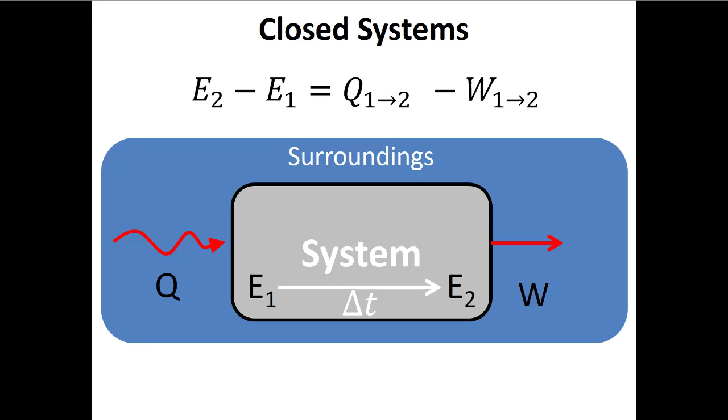And this is great as long as mass is not coming into or out of the system. The problem is, what we've learned so far is that mass itself carries some energy with it. This internal energy we've been talking about goes along with the mass. So if we have mass coming in and out of the system, we're going to have to use a more complicated version of the first law that tries to account for the energy that's coming into the system or leaving the system with the mass.

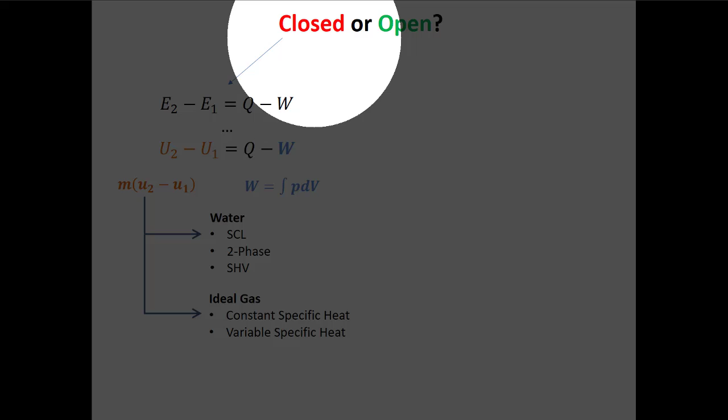So we know for closed systems, if you're thinking about studying for your exam, this is what we know: when we ask, is the system open or closed? If it's closed, we know we have this version of the first law. Then, if we make some assumptions about the relative importance of different energy terms on the left-hand side, we can get that it's the change in the internal energy that's equal to Q minus W.

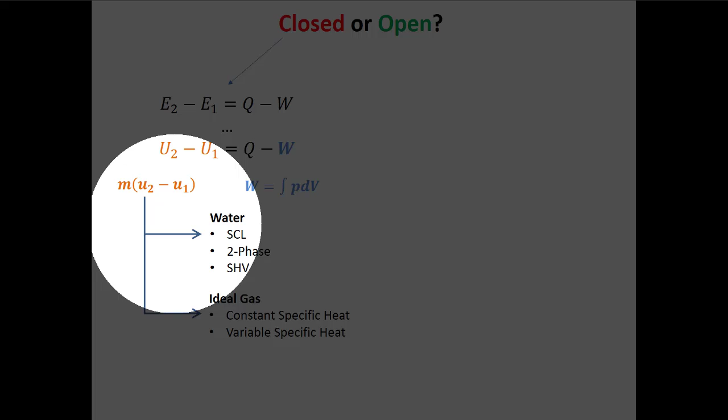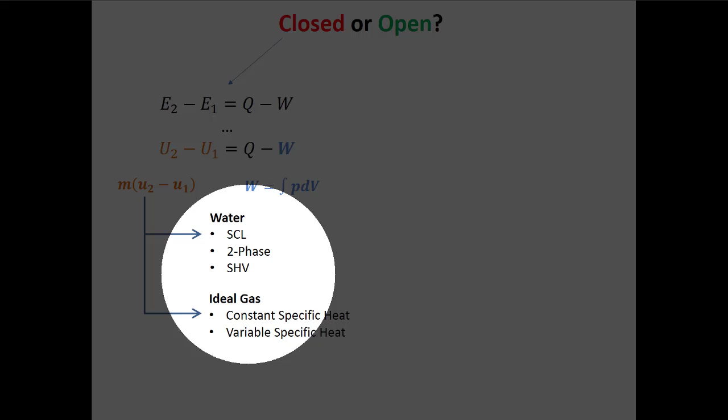We know how to find work, that's the integral of PdV. And then we can find delta U by taking the mass times the change in the specific internal energy. To do that, we need to ask ourselves, what's the fluid? And if it's water, I need to figure out which phase I have, whether that's a liquid, a vapor, or some mixture of the two, or whether the fluid inside my system is an ideal gas.

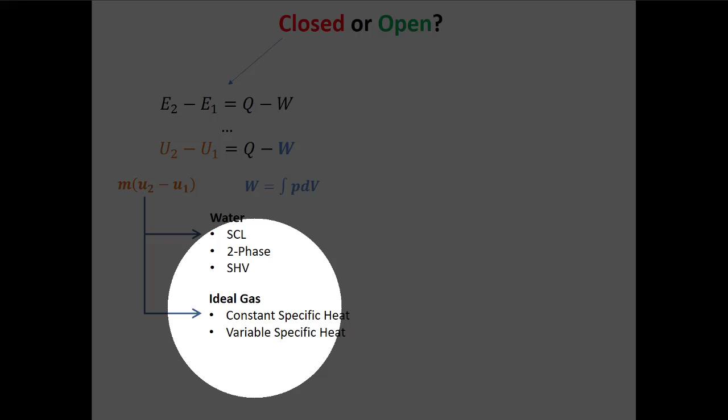And if it's an ideal gas, I can use the ideal gas law, but I also have to worry about what's going on with the specific heats. Is it constant specific heat, where I can say delta U is CV times delta T? Or is it a variable specific heat, where if I'm dealing with air, I have to look at table A22. So that's what happens if the answer to is it open or closed is closed. So we sort of know how to do that now.

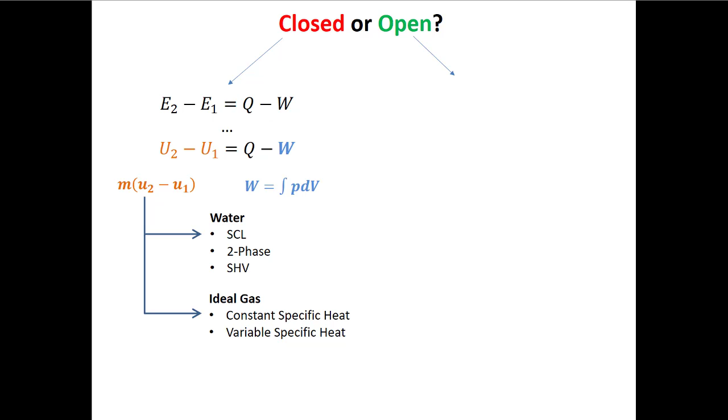So we're going to start the next section of the class, which deals with open systems for the most part. But then we do start to get into what happens when we put several processes in a row and chain them together to make a cycle. On the path to understanding how a nuclear power plant works, that's the first type of cycle that we'll look at.

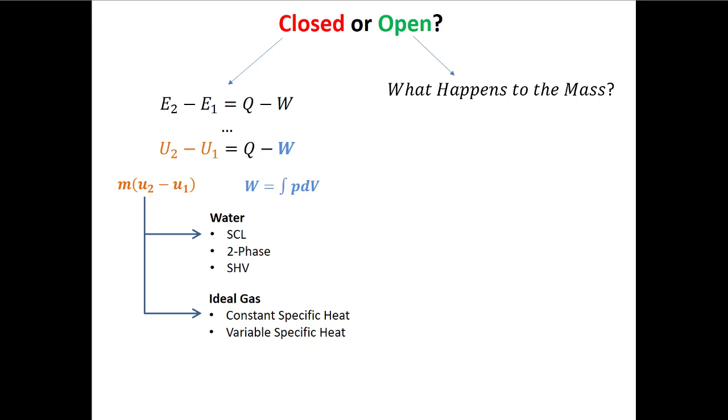We have to first ask ourselves, what happens to the mass? So I know in an open system that the mass is going to come into the system and/or leave the system, but I have to have a way to track how much mass is coming in and how much mass is going out, because the mass itself carries some energy with it, depending on properties like the temperature or the pressure of that mass.

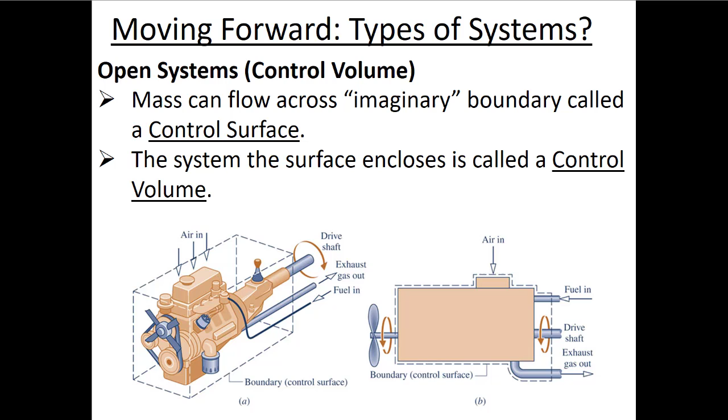Or it could be a real physical boundary, at least for the most part, if we were talking about flow through a pipe, maybe part of our control volume is touching the inner wall of that pipe. So the whole volume here is called the control volume, but the actual surfaces of this volume we call the control surface. That's actually the boundary, the border between the system and the surroundings. That's our control surface.

So when we start to do these open systems, there are a couple questions we need to be able to answer. The first is: where do I draw my control volume? The control volume might change over time, at least theoretically, but we need to know where we're going to draw it. This is my attempt at drawing a pipe.

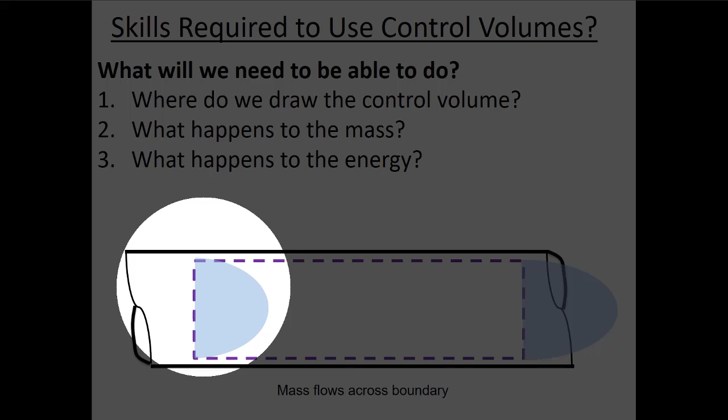What I typically try to do is have some surfaces on this control volume touching impermeable boundaries. The inner wall of the pipe is impermeable, mass can't go through it, so part of this surface is touching that impermeable surface. But there are also parts of your control surface that are permeable, because otherwise how can mass get in and out? So for a pipe, I'd draw my control volume so that part of these surfaces are perpendicular to the flow, going right across the boundary at 90 degrees.

So we need to know where to draw our control volume, and we need to know what happens to the mass. We have to account for how much mass is coming in and how much is going out, because only then can we start to account for the energy. Some of that energy is heat and work, like we've been talking about, but some of the energy change in our system is just from this mass going in and out.

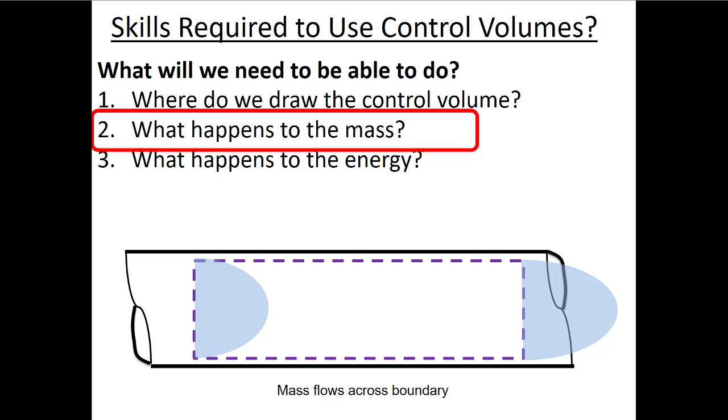First we're going to talk about how we account for the mass coming in and out. Then after a couple classes, we'll talk about what the first law looks like for these open systems. The equation that governs a lot of this is conservation of mass, which basically says that mass cannot be created or destroyed.

If we think about my system, I have here a cup. I know you can't really see me, but I'm holding a cup full of water, so my system is the cup. Maybe my control volume is the cup, but I have some mass of water in my cup. If I drink from that cup, then the mass goes down.

So to find the change in mass in the system over time, the mass in the system at time 2 minus the mass at time 1, I have to add up all the mass that came in and subtract all the mass that came out. With this cup, I can drink out of it, but it's not raining in Rochester today, though that happens a lot. I could put my cup outside in the rain, and there would be mass coming into my cup through that open top part of my control surface.

So here we have the change in the mass stored. This looks a little like our conservation of energy for closed systems, where we had the change in energy on the left side, but here it's the change in mass, M2 minus M1. We have to add up all the mass that comes in and subtract all the mass that goes out. This is the time-elapsed version of conservation of mass, and in words this talks about the net inflow of mass, which is just the sum of all the masses in minus the sum of all the masses out.

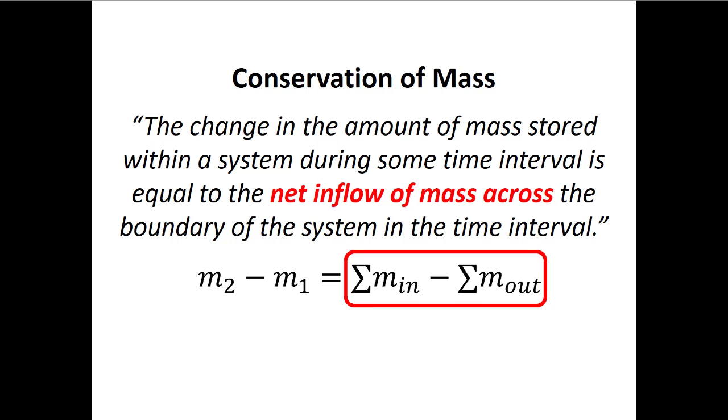Maybe every field has this, but sometimes we have these funny words for things, and you've got to break out your engineering decoder ring. Sometimes people call this conservation of mass equation, sometimes they refer to it as continuity. So if someone says we'll use the continuity equation, what they mean is conservation of mass.

So here's this branching pipe system, which is an open system. I'm going to draw a control volume in this system, that's this dashed line. Again, I'm touching the walls where I can, and then drawing lines that are perpendicular to the surface when I can't go along the surface. So I have some amount of mass in my system at time 1.

So that's the initial mass of my system, right? So I would know M1. Let's say I blocked all the outlets and I added mass to the system, right?

This happens when you flush your toilet. I don't know if you've ever looked inside, but there's a little flapper. It comes down, so it shuts the exits to the reservoir, and then water gets pumped in, and the system starts to fill up. So in this case, we'd be taking away all the places where mass can go out. We're adding mass into the system. So in that case, we know that M2 would go up, right?

This probably seems a little bit trivial in this elapsed time format. We could do the same thing where if we stop the inlet - think about this reservoir from the toilet. Once the flow stops coming in, if you flush the toilet and the flapper opens, now you allow mass to go out and the water drains from the reservoir. So as we increase mass out, the mass goes down.

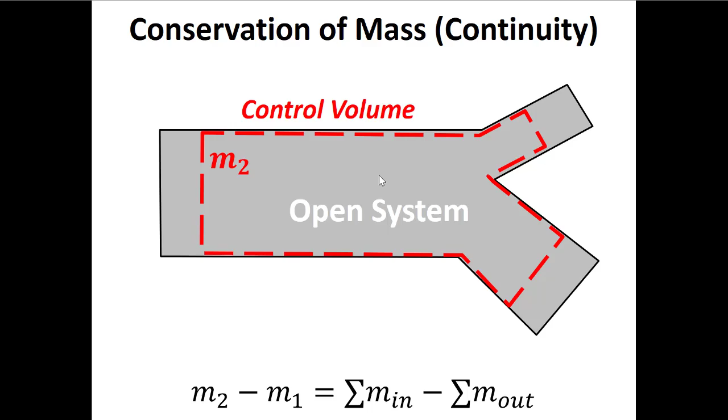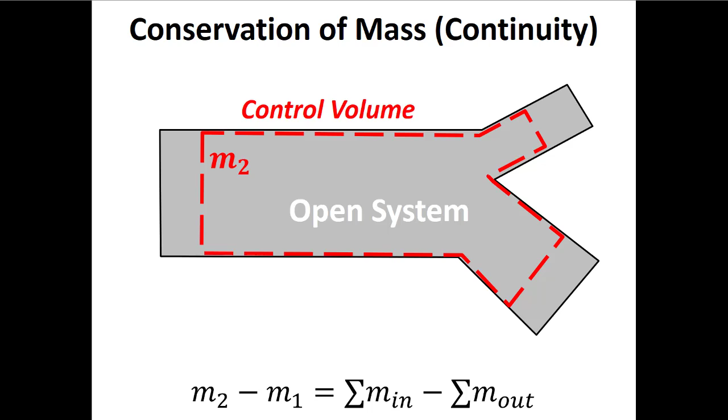So this hopefully shows you a little bit - it's a little bit trivial maybe, but it shows you that the form of this equation makes sense, as long as we're talking about mass, these changes in mass always in absolute terms. Then our signs are correct, so then we can find the mass at the outlet. So this is our continuity equation if we're talking about elapsed time - the change in the system mass is determined by the mass in and the mass out.

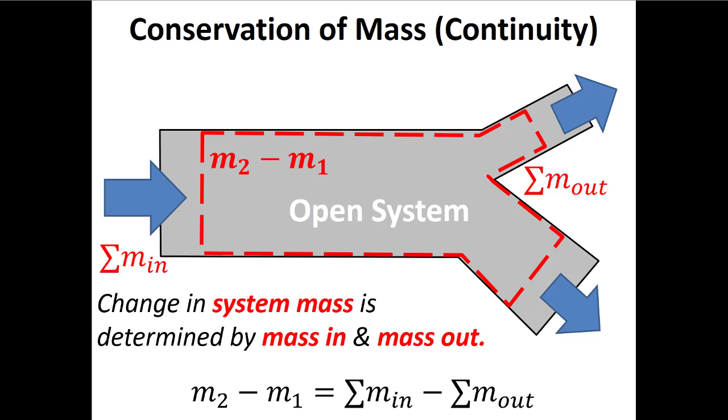I'm sure this is no big surprise to anyone. There's another special case we can talk about. Let's say it's a rainy Rochester day and I take my tea mug and put it outside, so there's water raining into my cup. It would normally fill up, right? But I could also have a case where I have a little bit of a hole in my tea mug, and there's water leaking out at the same time.

Now if the water that's leaking out leaks at the same rate that the water enters, then the water level in my cup stays the same, even though there's water coming in and going out at the same time. We can get to this special state, which we call steady state. At steady state, nothing changes, right? So that means the amount of water coming in doesn't change, even though you can still be having water coming in, but the rate at which it's coming in doesn't change.

The rate at which it's going out doesn't change. In the special case when those two rates are equal, when the amount of mass coming in equals the mass going out, so the water level remains the same, then the amount of mass in my system is not changing with time. So then we have this special condition that we call steady state. A lot of different machines will operate at steady state eventually.

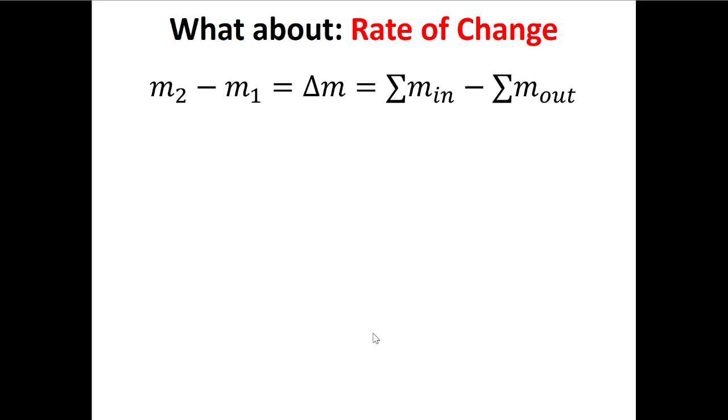It's interesting, one of my neighbors is a physics teacher in high school, and we were talking the other day, and I was saying how, kind of lamenting, as my kids are watching some TV, they talk about how hard calculus is. And I thought when I was in high school that the math they taught us, like completing the square, which is another way to find maximum and minimum values, was way harder algebraically than learning calculus. So hopefully you feel that way too. I kind of make some jokes about trying to minimize the amount of calculus that we do, but hopefully you start to feel comfortable with it, right?

So if we start to look at how things change with respect to time, then we start to look at calculus. We would divide all the terms in this equation by some delta t, and then we would say, well, what happens if that limit of delta t goes to 0? Or we start to talk about some infinitesimally small bit of time.

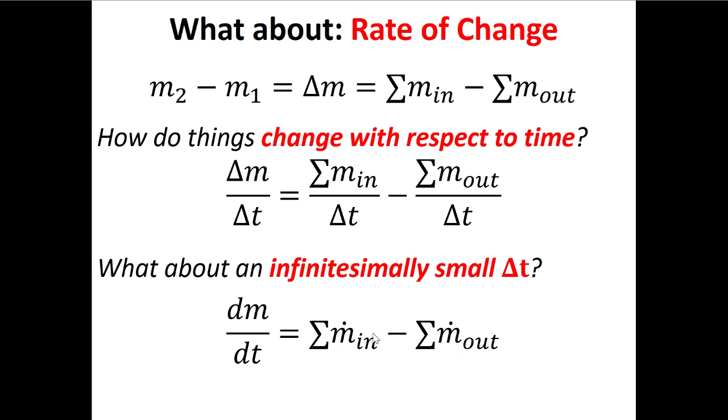So now it's like we're looking at the rate of change of these different terms in our equation, or at least the left-hand term becomes a rate of change. We denote these things a little bit differently. So you might be aware of this convention that if you have d something by dt, that's the same as something dot.

Now in this class, we don't quite use those things interchangeably. So if I talk about dm by dt, this is the rate of change of mass in my cup. This is related to, when my cup is sitting out there in the rain, how is the level of my cup changing. Now that's just height, but you can turn height into volume and volume into mass, if you knew the density. So when we have something that's d something by dt, that's actually the rate of how something's changing with time.

Now here, when I talk about m dot, this is a mass flow rate. So it still is mass divided by change in time, but when we talk about something dot, this is like, again, if I'm talking about that cup that's sitting out in the rain, m dot in is the rate at which mass is entering my system. So if I took all the mass that came in through the lid and divided that by the amount of time I measured it over, then this would be the rate that was going in.

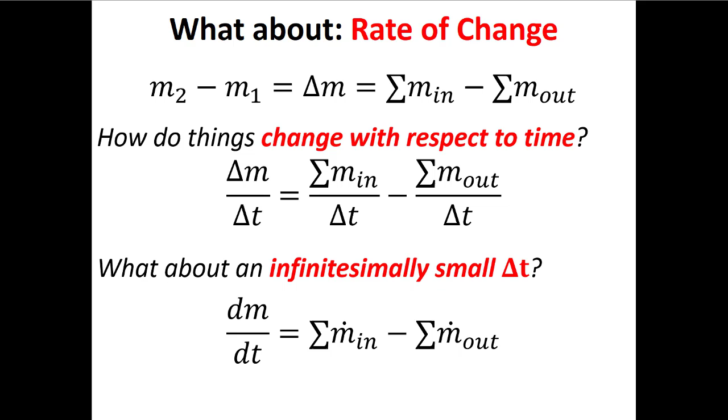But that doesn't mean it can't be constant. So it is a rate, but it doesn't necessarily change with time, this m dot in term and the m dot out term. So again, if we look at the verbal definition of this equation, dm by dt is the rate of change in the amount of mass that's stored within the system.

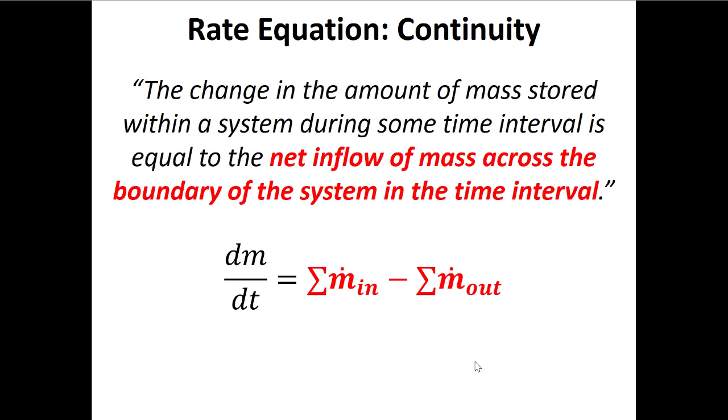M dot in is the sum of all the mass flow rates into the system. M dot out is also the sum of all the mass flow rates out of the system. And the reason these are sums is, if we thought about this branching pipe network, I could have more than one inlet into the system and more than one outlet out of the system. So the net inflow across the boundary is still the sum of m dot in minus the sum of m dot out.

So again, I can draw this kind of branching pipe system. Now inside my control volume, I think about dm by dt, the rate at which mass is changing inside my system. To get that, I would add up all the mass flow rates into the system and all the mass flow rates out of the system.

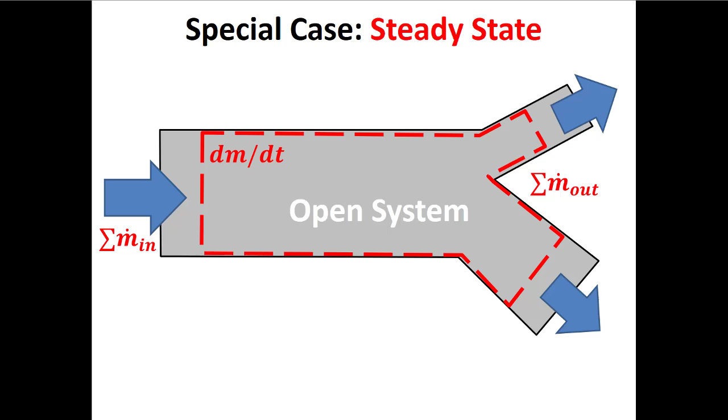So the change in the system mass is determined by the mass flow rate in and the mass flow rate out. Most of the time in this class, we're going to deal with the special case of steady state. If my cup is out there in the rain, this is the case where the leak is coming out at the same rate that the rain is driving water into my cup. In this steady state case, the rate at which mass is changing in my cup is equal to 0, because at steady state, the rate of change of everything in my system is 0.

So that means the rate of change of mass in my system has to be 0, right? But these m dot terms are not really rates of change, even though they're rates of how much mass is coming in. They're not necessarily changing with time. So this is the mass flow rate in minus the mass flow rate out. In this special case of steady state, which is a condition we'll talk about most of the time, m dot in is equal to m dot out.

And it makes sense to talk about this if you're thinking about a nuclear power plant, which you kind of turn on and then leave on for a very long period of time, thinking about this at steady state makes sense. It takes some amount of time for the system to get to steady state, just like your car took some time to get to cabin temperature in the wintertime. Or now that it's summer, you do the same thing with your air conditioner, which is removing heat from your vehicle, even though heat is coming into the cabin by heat transfer. You can get to a point where the cabin temperature stays the same, even though there's energy coming in and energy going out.

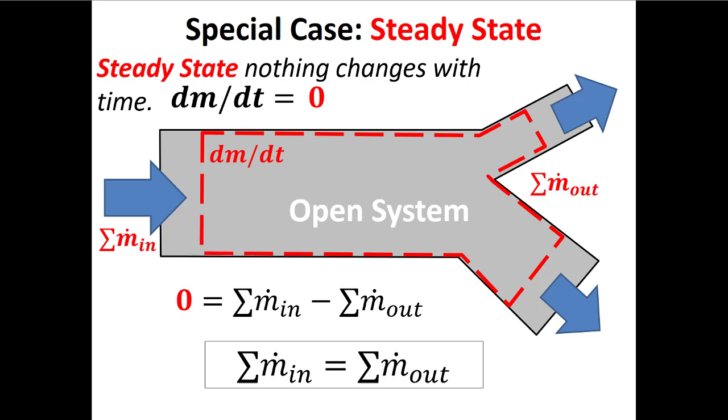So how do we solve a problem like this? There's one equation and three unknowns, so we want some equations for m dot. Almost every time in this class, although there might be some homework problems where this isn't the case, we're at steady state. So this dm by dt term is usually going to be 0, but you have to tell me that you know we're at steady state if you're going to cross that term out.

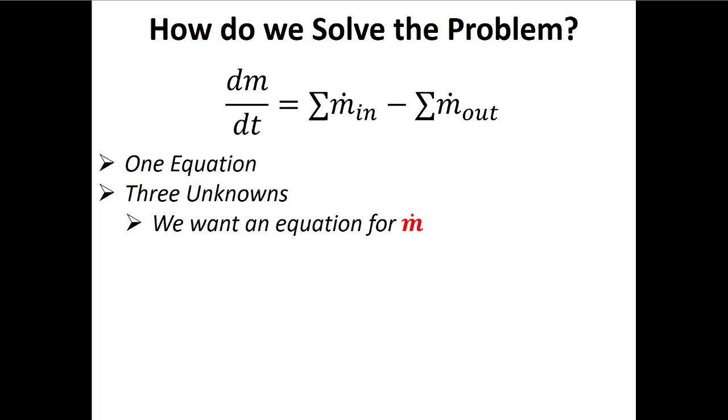So then how do we find m dot? Because even directly measuring mass flow rates is a little bit tricky—we don't usually do that. Instead, maybe we try to measure velocities. I don't know if you've ever seen something like this, but this is the idea of flow through a pipe. Now, I would imagine probably most people have not taken fluid mechanics yet, correct?

I'm going to assume this is when I miss being in a classroom, because people would at least nod. I think that's true, that most people haven't taken fluid mechanics.

So one of the things we do in fluids is think about fluids as tricky because it's this continuously deforming medium. We think of a fluid as little tiny pieces called fluid elements, and this tiny piece of water touching the surface has a special condition called the no-slip boundary condition. So if you're the fluid element touching the wall, it means you stay there forever because you don't move, while all your other friend fluid elements are floating by in the center of the stream. If you're touching the wall, you have the same velocity as the wall. And if you're a pipe, the pipes typically are not moving. But what happens is...

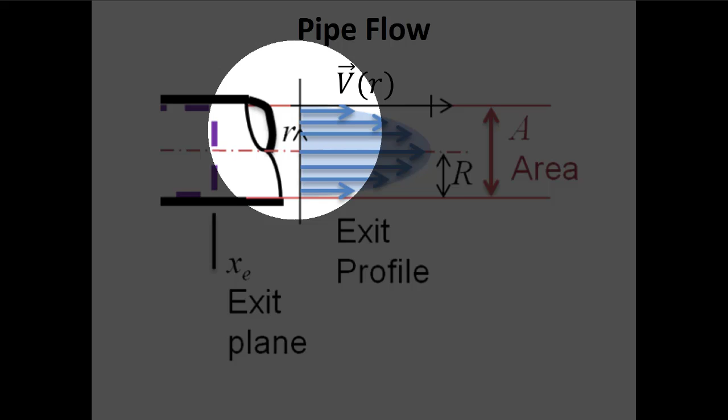When I was a kid, we played a couple of games. One of them was called Crack the Whip. It's kind of a skating game that maybe you shouldn't play because it's a little dangerous, but I guess you could do it running too. You're a bunch of kids in a line holding hands. The person in the center basically stays still, and the people on the outside are running fast. So the people furthest outside are almost pulling the people on the inside forward, and they kind of run in a circle, and eventually the tension gets too big and people fall down. That's why maybe this isn't the best game to play.

But this is kind of what happens with these fluid elements: the fluid element touching the wall has no velocity—it's still because the wall is still. But this fluid element here is being pushed by some pressure.

So the fluid wants to move forward, but it's like holding hands with the two elements beside it. The element closer to the wall creates friction so that fluid element doesn't move, while the fluid element closer to the center of the pipe is pulling it forward. So it gets some shear, because it's being pulled.

So you get this velocity profile where you get a velocity maximum in the center. This parabolic shape is typical of what we call laminar flow. Laminar flow is the case where if you open up your tap just a little bit, it's this very clear, beautiful flow. You can look through it.

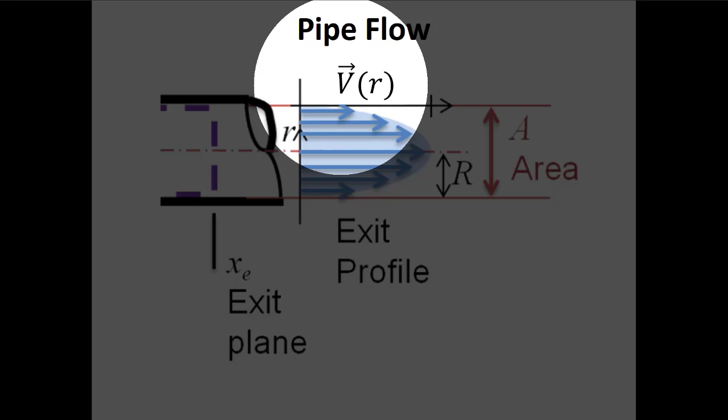So this is a picture of flow through a pipe. We have a bunch of variables: velocity in the pipe as a function of the radius, a coordinate system r, big R which is the actual radius, and some cross-sectional area. We're trying to get to a point where we can calculate the mass flow rate.

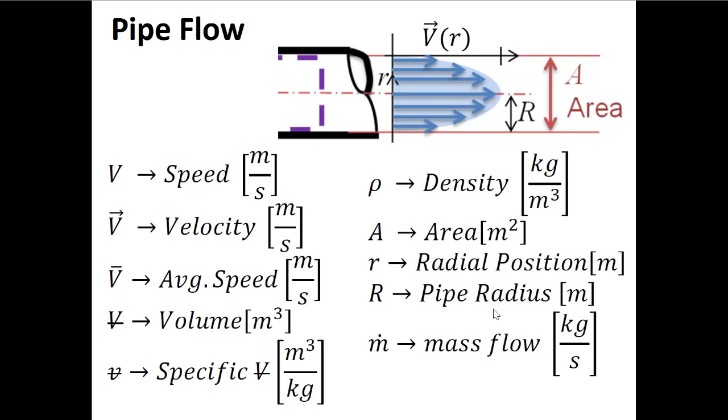There's a bunch of terms here, I'm not going to read them all. Some important ones are the density, the cross-sectional area, the radial position, the radius of the pipe, and we're trying to find the mass flow rate. So we'd have to do some calculus if we were going to try to do this.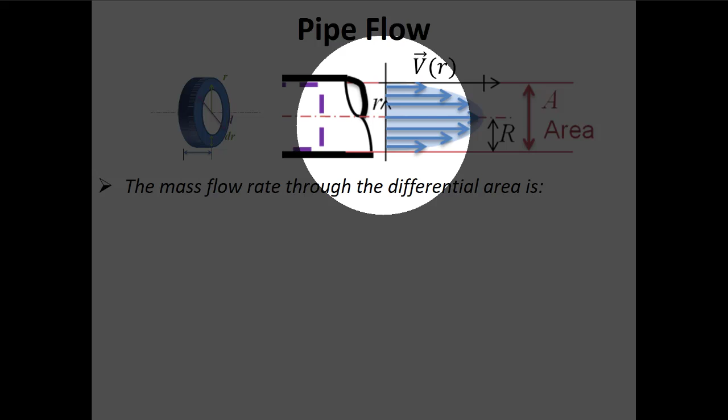Don't worry, you're never going to have to derive this equation in this class, although you may have to in fluid mechanics. What you would do is integrate from r equals 0 all the way out to r to find the mass flow rate, which is the density multiplied by the velocity times the area. If we multiply this out, area is in meters squared, velocity is in meters per second.

So this would be meters cubed per second, just the velocity times this infinitesimal piece of area. This is like a volumetric flow rate, telling you how many cubic meters of water are flowing through your system per second. But we want a mass flow rate, so we have to multiply by kilograms per meters cubed, and then we get how many kilograms are flowing through your system in a particular amount of time.

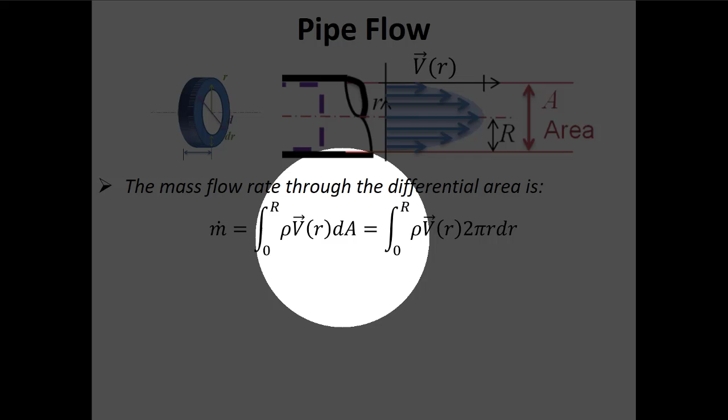So now we can change this small element of area into 2 pi r times some small element of radius. This is just showing that the units work out, which I just talked through. This is always a good idea when you have an equation — we're supposed to be a little bit skeptical when we're learning things. I can't prove to you that this equation is correct, although it's in the textbook, but it does give us the right units.

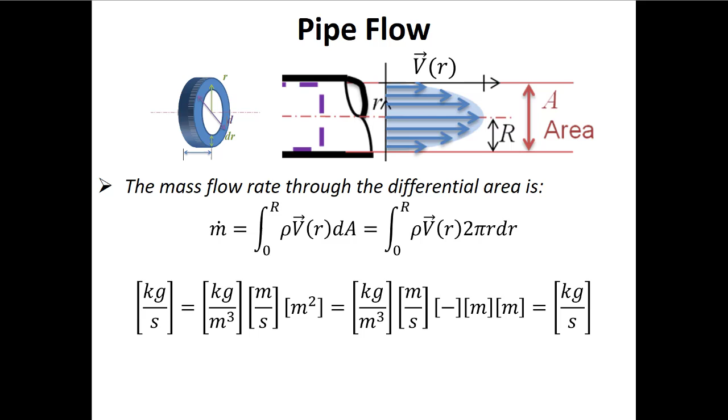And if it gives us the right units, we at least can't prove that it's incorrect, and that's something good. So here, if velocity was not a function of the radius — in real life, especially in laminar flow, velocity is a function of the radius — but what if we take some average velocity? And if we think the density of the fluid doesn't change with the radius, this is a little more reasonable, because density is a function of temperature, but the temperature is probably pretty uniform at any particular cross-section inside our flow.

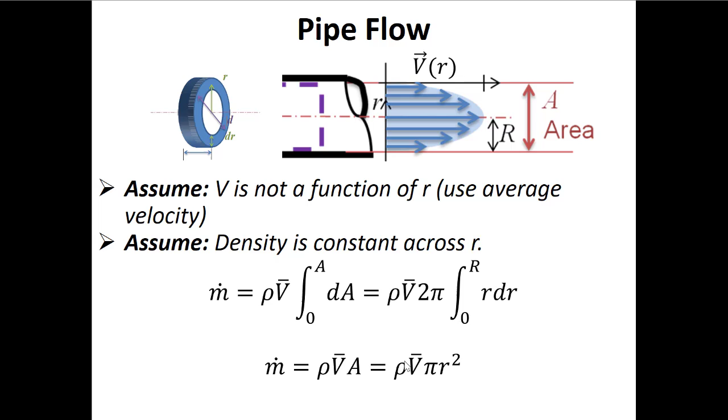So if the density and the velocity are constant, I can pull those out of my integral. Or with my 2 pi r dr, 2 pi is also constant, so I can pull this out, and now I'm integrating from 0 to r. So basically this tells me the mass flow rate is the density times the average velocity times the area, or the density times the average velocity times pi r squared if this is a pipe.

So now I have an equation, but it's pinned on the assumption that the density and the velocity are not changing with the radius.

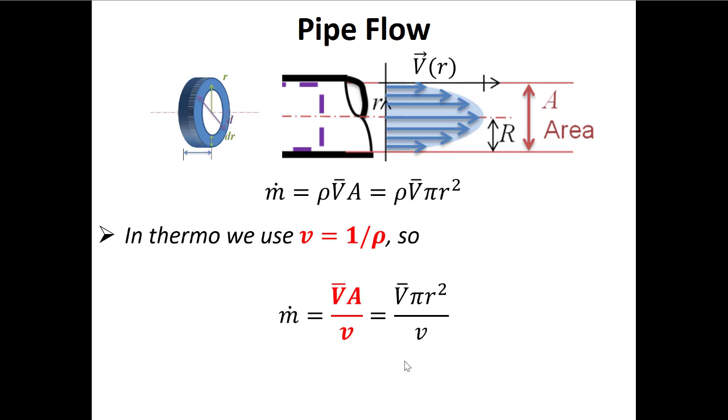In thermodynamics, we wouldn't write it out this way usually, because instead of talking about density, we'll be talking about specific volume, or little v. So when we talk about mass flow rates, oftentimes the way we'll write this out is that the velocity times the area divided by the specific volume is equal to the mass flow rate. In this case, for the pipe, the area is pi r squared, but that won't always be the case. You could have a rectangular duct, and this equation would work just as well, at least the equation in red.

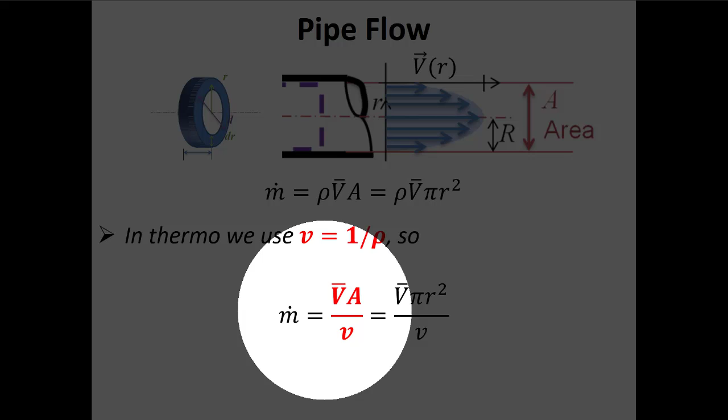So now I think anytime we use an assumption, we should always go back to this idea of, well, does that assumption make sense? Is it reasonable for me to do that?

I tell this to my PhD students and my master's students: at the end you have to do a thesis. Your thesis is a chance for you to share the work you've done, the contributions to science you've made, and there's always questions about, well, why did you do this way, or was it reasonable for you to do this? The answer should never be things like, oh, because my supervisor told me to, or oh, I did that because it was the easiest way for me to do it, because those aren't really the questions people are asking. The question we should always ask when making assumptions is: was this a reasonable thing to do?

Every time we make an assumption, we take one step further away from reality. So we have to track these assumptions, so that if we want to go back and make our models better, we know where we made assumptions and which ones we can try to tweak. But it's also important to say, maybe when I make these assumptions, it's good in one case, but not so good in some other case. So it's important to know these things.

I think here, the idea that the velocity is approximately constant, or that we can use an average velocity to characterize the flow through a pipe, in most cases is pretty good. So we talked about this idea of laminar flow. Laminar flow happens when flows are relatively slow, like if you just open your tap a little bit.

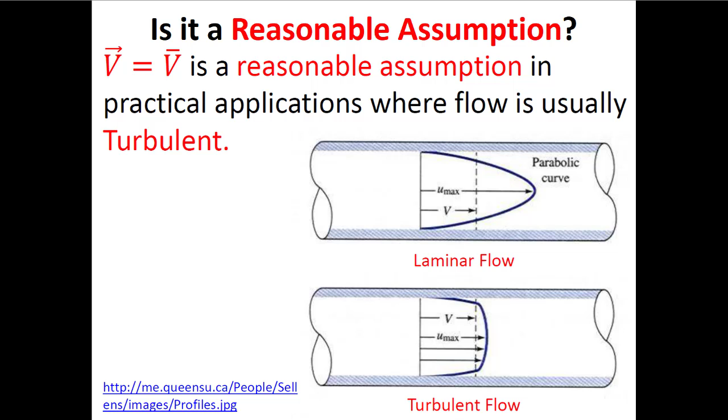If someone looking at turbulent flow said, well, this is a stochastic flow, that means we know the average properties, but we don't know instantaneously what's going to happen all the time. Just like modeling the stock market, where you kind of know that over long periods the S&P 500 has returned something like 7.5% per year, but some years, like this year, you get some wild swings in there too.

So when we talk about conservation of mass, it's reasonable to make these kinds of assumptions because most practical things you'll deal with as a mechanical engineer, provided you're not at very slow flows with very viscous fluids, or with very small channels, in those cases maybe you'll get laminar flows. But most practical engineering flows are turbulent. So this equation for m dot is pretty reasonable in that case.

So then these m dot terms, which are different from the dm by dt terms, can be replaced by average velocity divided by specific volume, multiplied by cross-sectional area. So our conservation of mass equation becomes: the rate of change at which mass is entering, being stored, or removed from the system equals the mass flow rate in, written this way, minus the mass flow rate out.

So we can find the mass flow rate if we're not given it. Oftentimes if you're trying to measure mass flow rate, maybe you'll have some device in there, like a turbine flow meter that turns the rotation of some fan blades you stick in there into a velocity measurement. Then you'll know the cross-sectional area of your pipe, and maybe you'll measure the temperature and pressure, and from that you can find the specific volume. With those pieces of information, you can figure out the mass flow rate.